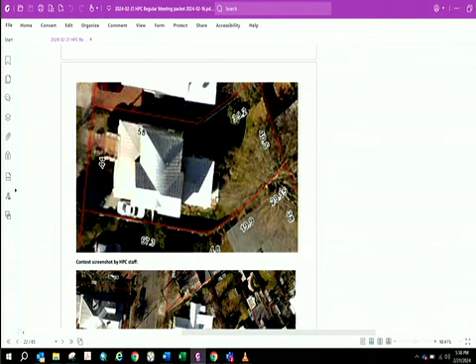So this starts off with aerial photography of the site. The first one was provided by the applicants. You can see here the property has a slight dog leg to it, so it's not quite the normal rectangular situation, which leads to why the design is the way it is. Then staff has added an aerial showing a little bit more context around there, showing the various other homes in the area, so that you can refer to that if you want to.

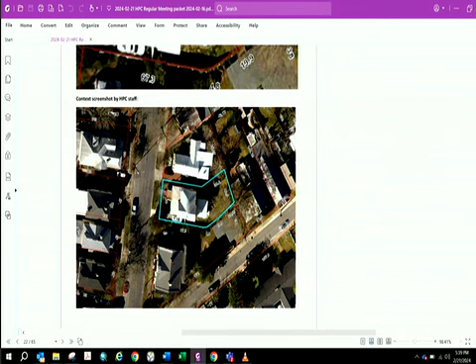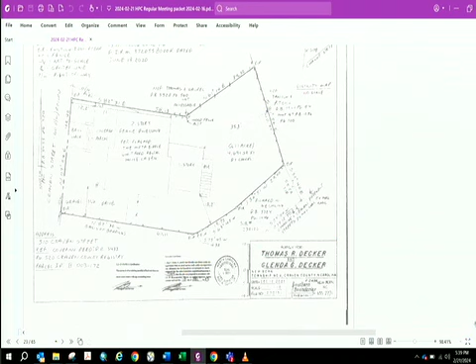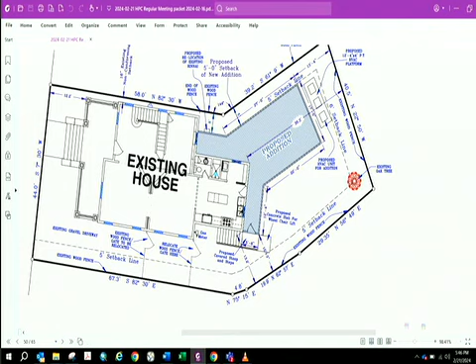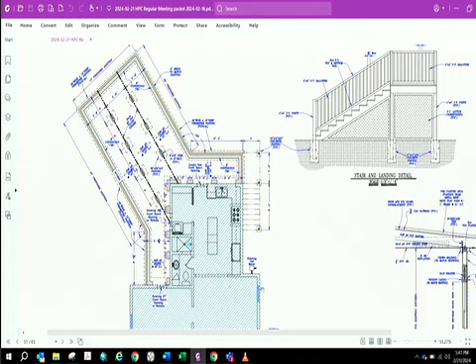Here's an elevation detail of that stoop from the south, and I'm going to make this a lot smaller. So we see the actual plan over here on the left. This happens to be the footing plan or foundation plan. And then on the right is also a wall section for the construction, all the way down through the footing.

All right, next page shows the floor plan on the left. I'm going to move this up some more. There we go.

The orientation on this plan is different than the other plan was, but now we have the 2 legs that wrap around the existing addition shown here, and then the large rectangular area extending into the backyard is here on the upper left. You can see the 3 mechanical units there. So that's a master bedroom, and then we have the bathroom, which is the left or northern leg, and an extension of the kitchen with a breakfast room as the other leg on the back of the existing addition. And then in the middle is some computer room and access ways, hallways.

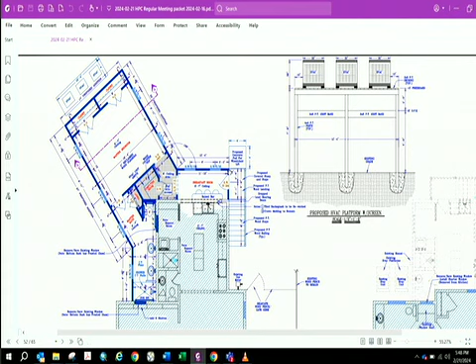So in addition to all of the things mentioned before, this plan also shows a proposed concrete pad for a wheelchair lift right off the right side, or eastern side, of the stoop. And so the railing is gone on that end, or at least not shown, to allow for the lift to access the stoop from there.

You see the details here for the mechanical units, and then this on the right is essentially the second floor, just showing a ghost view of what the first floor plan is below, existing.

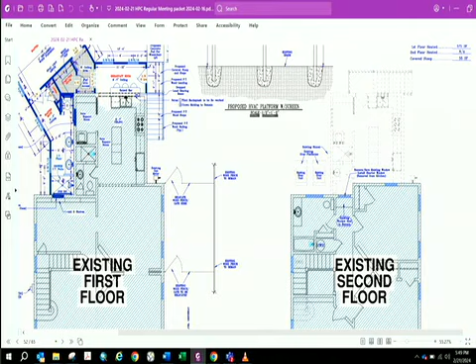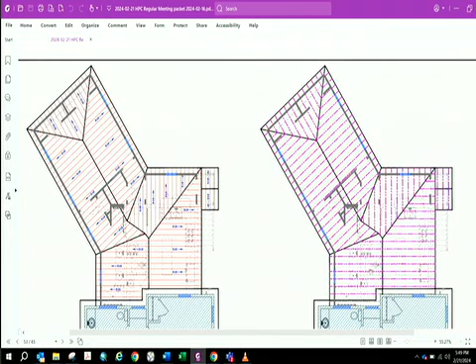Next page. These drawings are basically the roof framing plan on the right, and on the left is a roof slope plan showing the slope everywhere is a 3 and 12 slope, and then some of the framing on the right hand side is somewhat modified from existing.

Okay, we'll make this a little bigger temporarily, apparently.

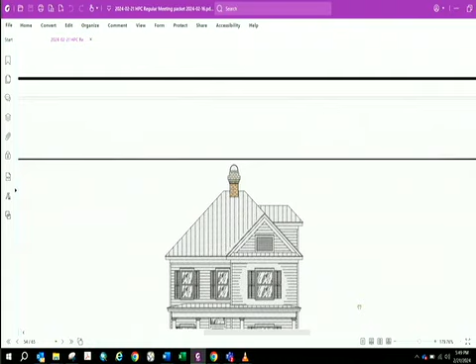This is just the existing front elevation of the house. And then the new addition is way in the back, behind the neighbor's fencing and bushes and everything, with a 1'3" gap, so you might be able to see some of the actual addition from the street.

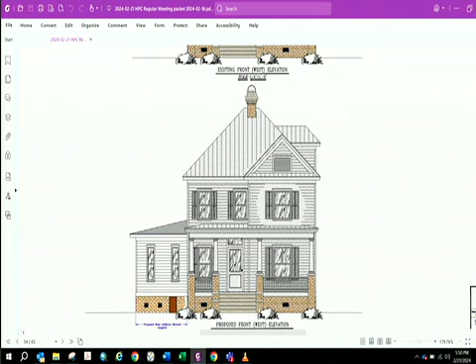Now we see this small section. This is the southern side, or the right side of the house, existing. And then the proposed shows the stoop has been added to the end of one leg, and then the bedroom wing is now angling back into the backyard.

You can see there's some modifications to the roof at this point because of the now longer distance to the edge of the house. Also to note here is that the foundations, since the design review meeting, have actually pushed back the panels between what they represent as piers and the foundation. So they've now added that, because that's what the existing house has, the historic portion of the house.

They also have added an access door here, and it looks like proposed pressure-treated wood access doors underneath the stoop, instead of previously it was just lattice.

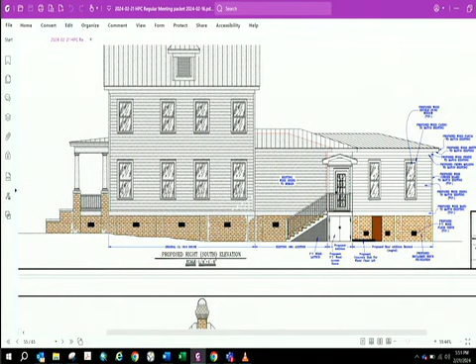So this is now the existing rear elevation. In addition to the changes happening on the first floor, of note is this second floor window. This window ends up changing in shape, so that one is to be removed and saved, and I believe used elsewhere, as well as the other window on the first floor.

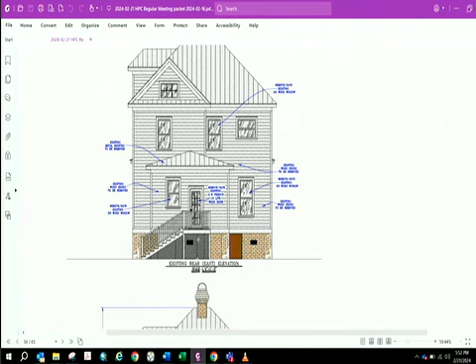Remember when we looked at the photographs and there was that window - that window will be filled in, so they will remove it and save it, and I believe reuse it also. The other one is on the back here in the existing addition. This window also will be removed and saved, and I guess also the existing French door as well. So I believe they reuse all of those.

So now here's the new proposed addition, and you can see, starting from the top, there's that window that's now a slightly smaller size. Then the addition itself with the stoop on the left, and then the various windows on this side - you can see 3 on this side, there's none on the back. There are the 3 mechanical units shown there.

And the various changes in roof lines. This vertical line represents the current edge of the existing addition, which will no longer be there.

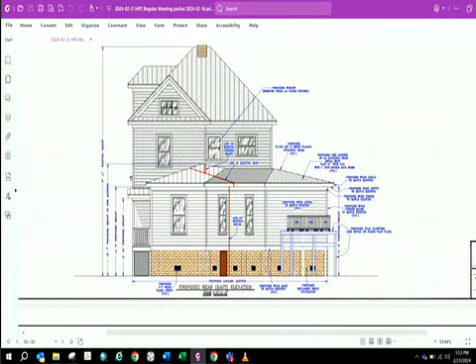The existing north or left elevation with the 1'3" setback on this side, but that's the existing condition. And then with the new addition, now on this side we have 4 windows, and you can see that same pattern on the foundation continues on this side. There's another access door.

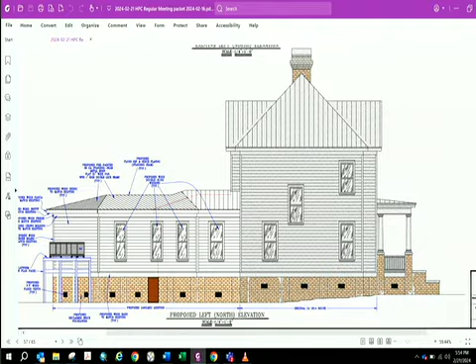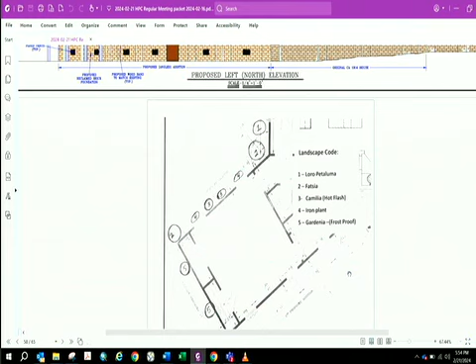Also requested at the design review meeting was some ideas for the landscaping for this project, especially considering the very high foundation. So here's the landscape plan, and they indicate these 5 various different kinds of plants, numbered here around the perimeter. They're on the southern, southeastern, and northeastern sides of the house. None are shown along the northwestern side.

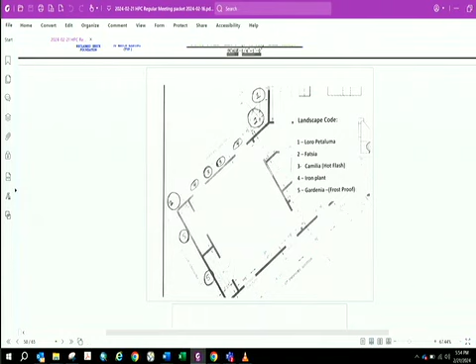And then we have here our zoning and inspections review - let me make this bigger so we can actually read it - for 514 East Front Street. We can see at the bottom that the zoning administrator has said that the project meets the requirements of the land use ordinance, and the chief building inspector has indicated that the project will require a building permit, with comment that building and floodplain development permits are required.

Until you're ready for our findings and evaluation.

Okay, very good. Mr. Tom, do you have anything to add that Matt may have overlooked? I don't think so, sir.

Is there anyone in our audience who would like to speak for or against the application? Seeing none, no need for rebuttal.

So, Matt, if you could give us staff's recommendation. Okay. Should have just stayed there. Yeah, sorry, no, not you. All right.

So these are our findings and evaluation for the project of 514 East Front Street for Thomas and Glenda Decker. The historic property name is the Meadow Whitford Rental House, built in 1914. It is a contributing structure in the historic district. The National Register inventory description from 2003 described the house as 2 stories with an L-plan, 3 bays wide, pedimented right front bay, and a hip roof. For Sandbeck, the description in 1988, the most relevant information is this 2-story frame house exhibits simple colonial revival detailing.

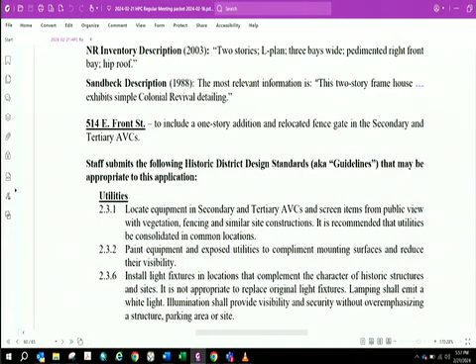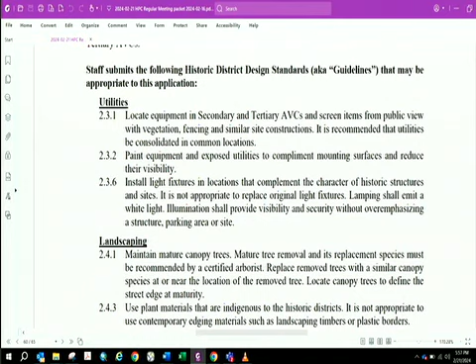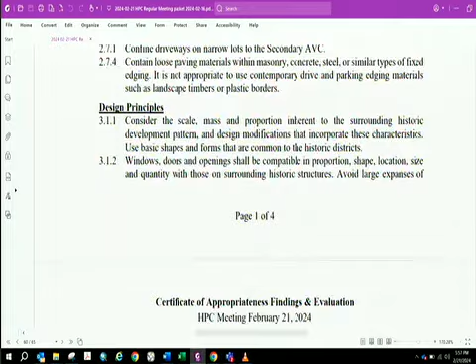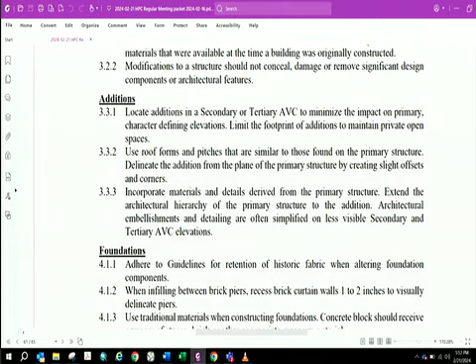Staff submits the following historic district design standards, aka guidelines, that may be appropriate to this application: for utilities, 2.3.1, 2, and 6; for landscaping, 2.4.1 and 3; for parking, 2.7.1 and 4; for design principles, 3.1.1, 2, and 4; for modifications, 3.2.1 and 2; for additions, 3.3.1, 2, and 3; for foundations, 4.1.1, 2, 3, 4, and 5.

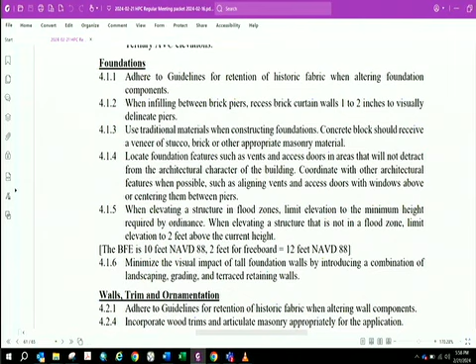To note is the BFE, the base flood elevation, is 10 feet NAVD 88, plus 2 feet for freeboard, equals an established floor height of 12 feet NAVD 88.

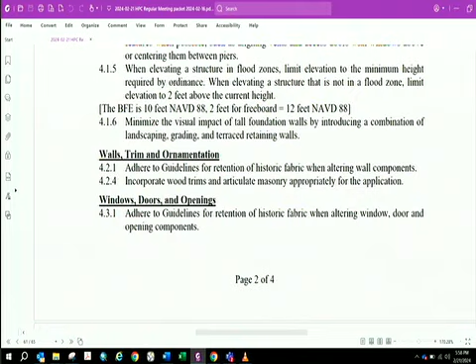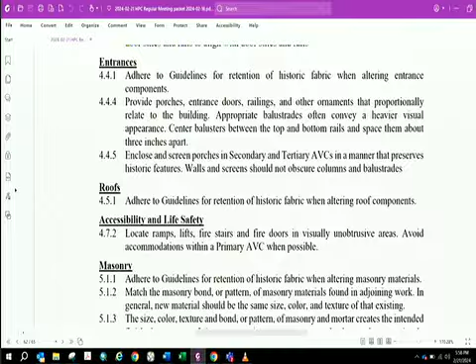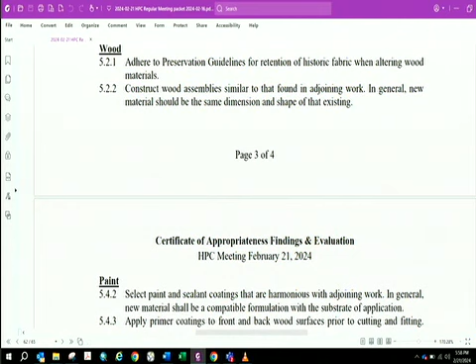Then 4.1.6 for walls, trim, and ornamentation; 4.2.1 and 4. For windows, doors, and openings, 4.3.1, 2, 3, and 6. For entrances, 4.4.1, 4, and 5. For roofs, 4.5.1. For accessibility and life safety, 4.7.2. For masonry, 5.1.1, 2, 3, 4, 5, and 6. And for wood, 5.2.1 and 2. For paint, 5.4.2, 3, and 4. And for contemporary materials, 5.5.6.

So statements of fact based on the information in the application: 1, the structure is a contributing structure in the tight weave development pattern. 2, the project is an addition to a contributing structure in the secondary and tertiary AVCs. 3, the proposed design components and materials meet the requirements of the historic district design standards. 4, the zoning administrator and the chief building official have reviewed this project and commented accordingly. And 5, the application is not incongruous with the guidelines.

All right, thank you, Matt. Okay, commissioners.

As you formulate questions or what type of information we might want to discuss, I've made a list of things that have changed since design review, Mr. Tom — you let me know if I miss anything. We've got an illustration showing the relocation of the fence at the drive, a landscaping plan, mechanical units that I presume show the correct base or design flood elevation height referenced in the recommendations, a place for a wheelchair lift that may or may not be new, but it was new to me tonight, and lastly I think the foundation articulation has changed to show the inset masonry between column piers.